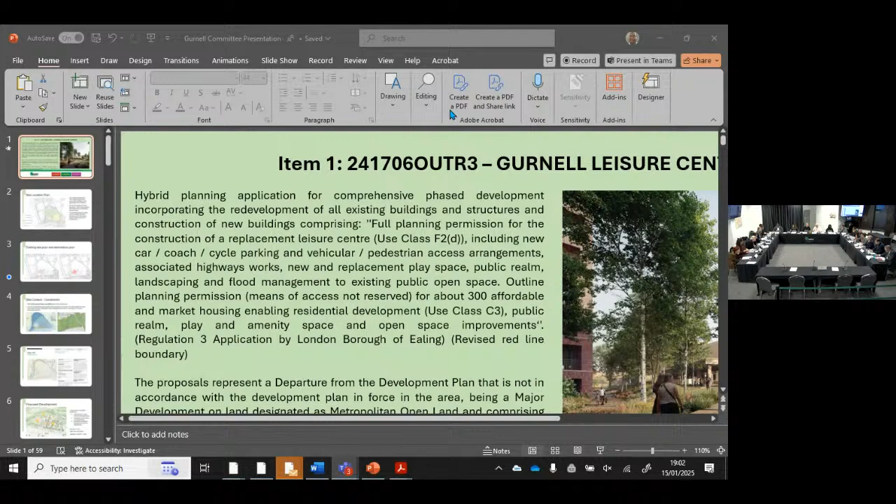Right, as I said, we're going to take planning application Gurnell Leisure Centre first on the agenda tonight. So who's doing this one? Olivier. So if you'd like to introduce it, Olivier, please.

Thank you, Chair. Just to bring to your attention the briefing notes which detailed amendments to the recommendation, namely condition 2 revised drawing numbers, condition 24 about electric vehicle charging provision, as well as further representation from Sport England, which was with regard to conditions 58 and 59 and the particular wording of those, as well as 2 additional public consultation responses which have been responded to within the briefing note, and also responses that were in the original report which was published. And then there are a few clarifications on 4 different pages, namely 14, 49, 50 and 81.

And so we're here to discuss the scheme at Gurnell, which is for a replacement leisure centre, improvement of parkland, and an outline for up to 300 homes. The scheme has been consulted with the GLA, and the Stage 1 report detailed that a replacement leisure centre is supported in principle, subject to demonstrating very special circumstances within the metropolitan open land, minimising harm arising from the application, and strengthening public benefits of the scheme.

As this is a council scheme on public land, it would be required to meet 50% affordable, but this was not possible to follow the fast track route, so the scheme was viability tested by DVS. This showed that the scheme could provide 35% affordable housing with a split of 65% social and 35% intermediate.

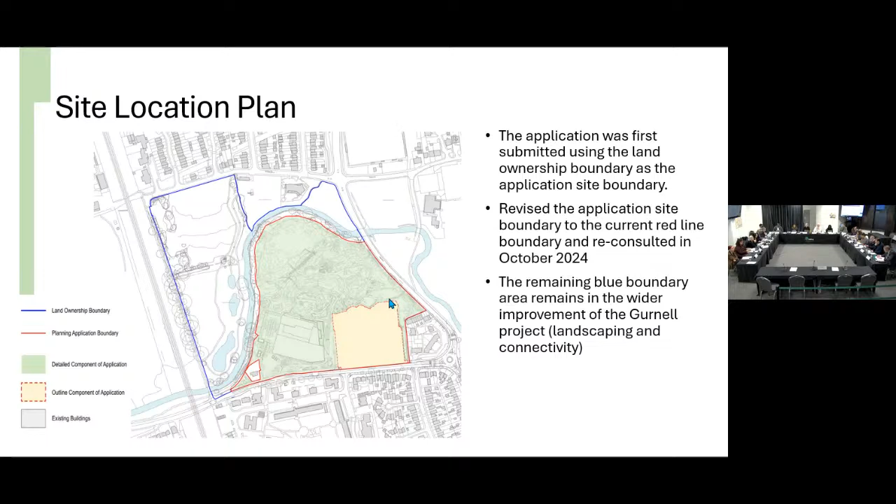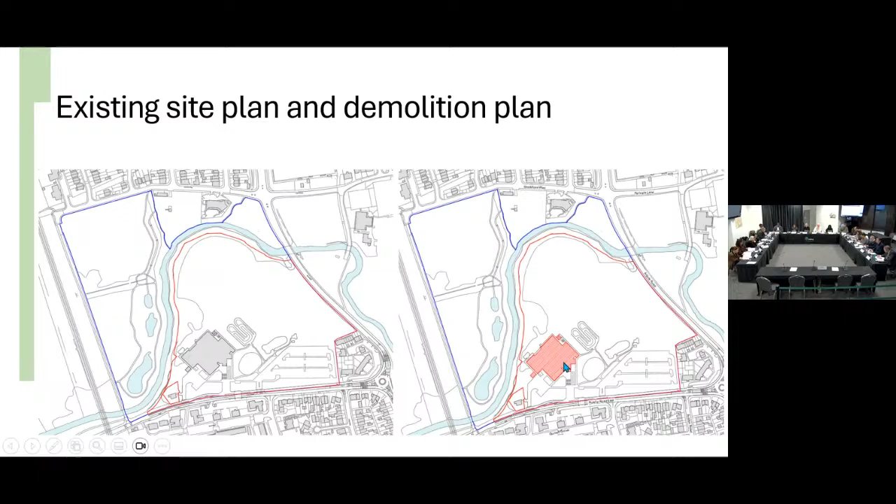This is just to show the proposed development and where the existing leisure centre is to be demolished, etched in red. The site has constraints: it's within metropolitan open land and public open space. The River Brent runs along the north and western boundaries and forms part of the Blue Ribbon Network.

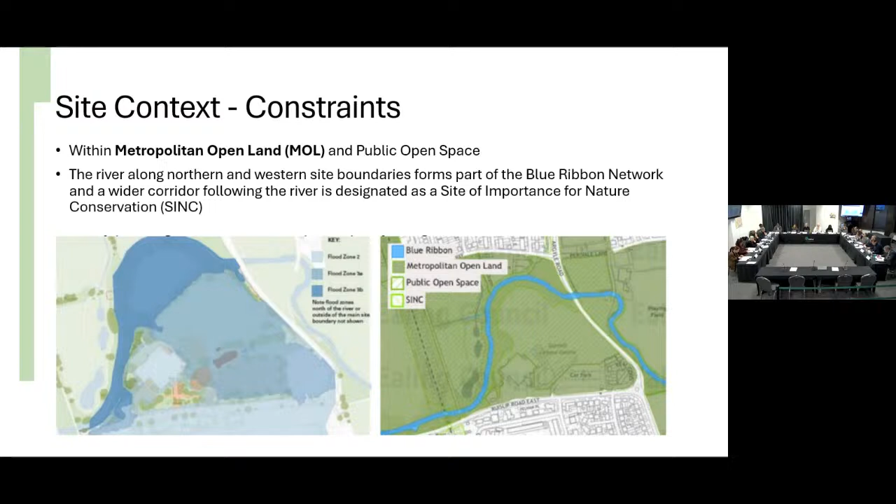Here you can see the site allocation, and it details what is considered acceptable for a proposed use. This should be a leisure-led scheme encompassing both indoor and outdoor facilities with enabling residential use. It makes reference to the previous application, the public transport accessibility of 2 to 3, and it also mentions tall buildings and heights of up to 6 storeys. You can also see the flood zone details - flood zone 2, 3A and 3B, and flood zone 3A of surface water.

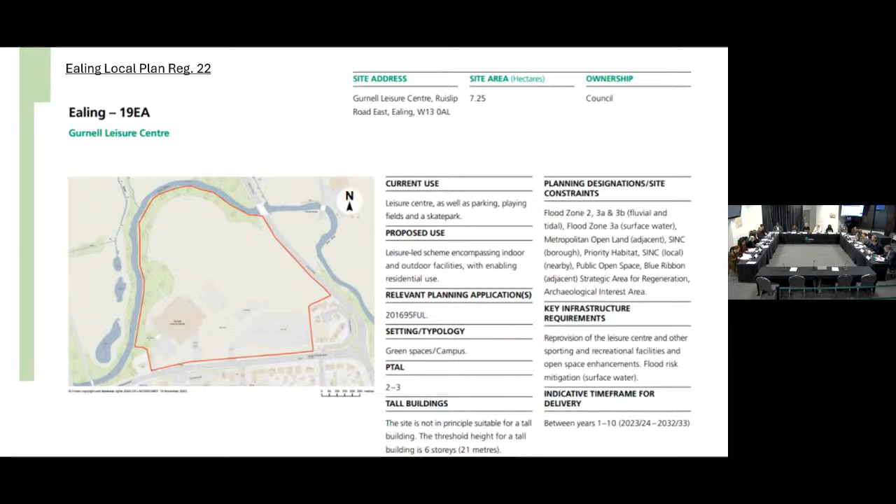And this mentions an indicative timeframe for delivery of between 1 to 10 years.

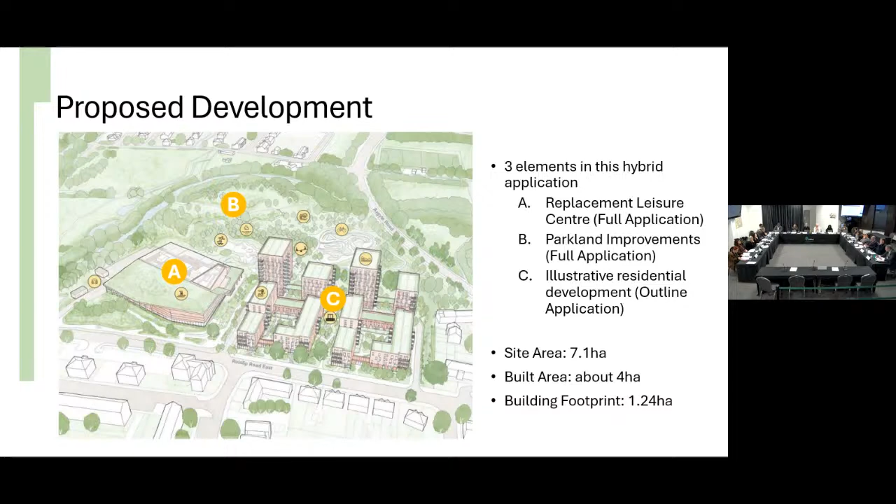Here you can see the proposed development, and this hybrid application forms 3 parts. Part A is a replacement leisure centre, which is a full application, and Part B is parkland improvements, which is also part of the full application. Part C is an illustrative residential development of up to 300 homes, which would be located here, mainly on the existing car parking space for the current Gurnell Leisure Centre, with some encroachment onto the MOL.

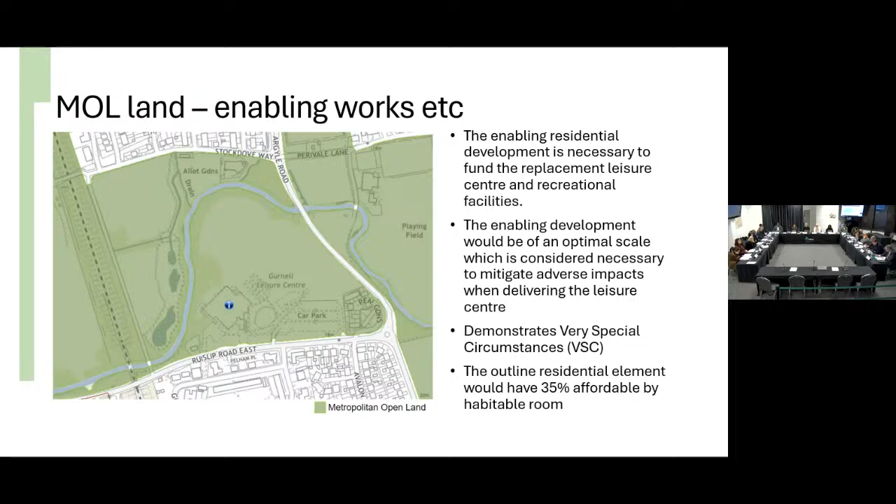The enabling residential development is considered necessary to fund the replacement leisure centre and recreational facilities. The enabling development will be of an optimal scale, considered necessary to mitigate the adverse impacts when delivering the leisure centre. The scheme and the report are able to demonstrate very special circumstances.

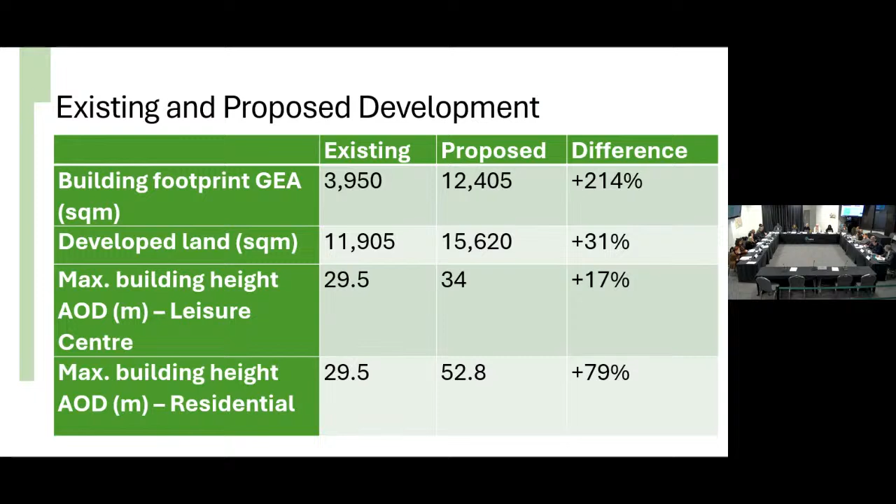Here is just a slide detailing the existing and proposed development footprints, and the increase in building footprint. In terms of the heights, that is AOD from sea level, which is mentioned at the bottom here - so that's why it would appear that the heights are higher, where 52.8 metres is mentioned.

But just to make you aware, the leisure centre would have a maximum height of 16.5 metres, and the residential element would have a height of 34.

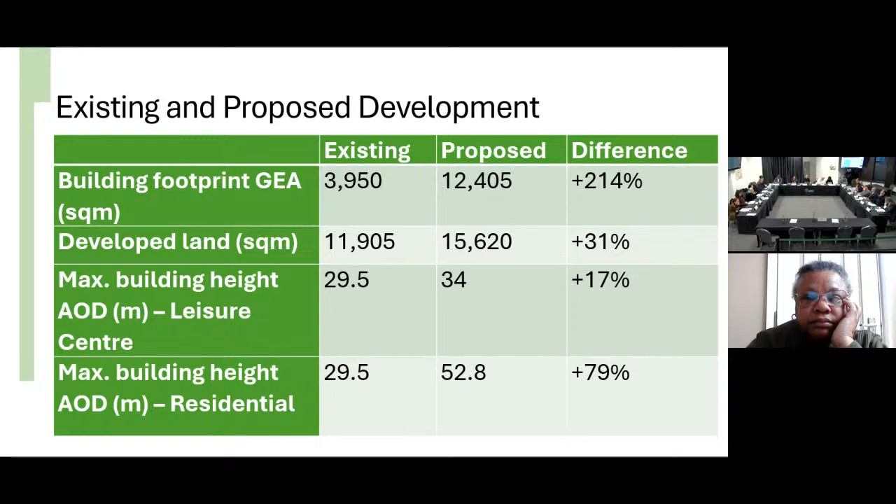So this is just a breakdown of the floor spaces of what is to be proposed. The leisure centre has a 50-metre 10-lane swimming pool, which is Olympic sized, replacing the existing 50-metre 6-lane swimming pool. As well as this, there would be gym and fitness facilities. An addition would be a learner pool, as well as fun slide pools. There would be spectators at first floor level, which I will show later on.

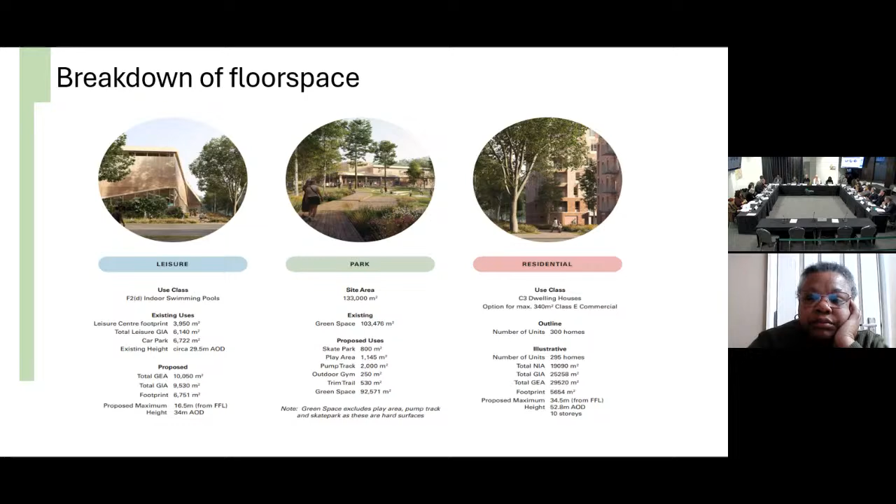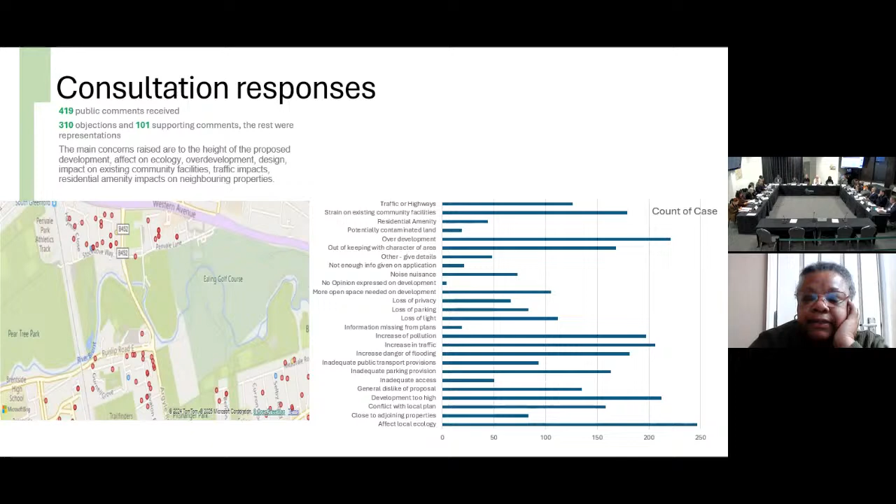With regard to the scheme, there have been 419 public comments received - 310 objections and 101 in support. Many of the responses are from within the London Borough of Ealing, and the main concerns raised are to do with the height of the proposed development, the effect on ecology, overdevelopment, design, impact on existing community facilities, potential traffic impacts, and residential amenity impacts on neighbouring properties.

As with all major schemes, there's been a lot of discussion with regard to design, and the application has been to design and community review panels, as well as referred to the GLA. This is a requirement of the NPPF. This slide details when the scheme first came in at DRP, which are stakeholders who have an interest in design within the locality, and then the community review panel, made up of members of the public in Ealing who give up their time to review schemes at an early stage.

Throughout the scheme, the design has been changed. What was considered key, especially at DRP, was the creation of design codes, and also how the leisure centre was designed. Concerns were raised with regard to coach drop-offs, especially due to the existing situation with Ruislip Road East, and this has been agreed to be moved to Stockdove Way for a waiting area.

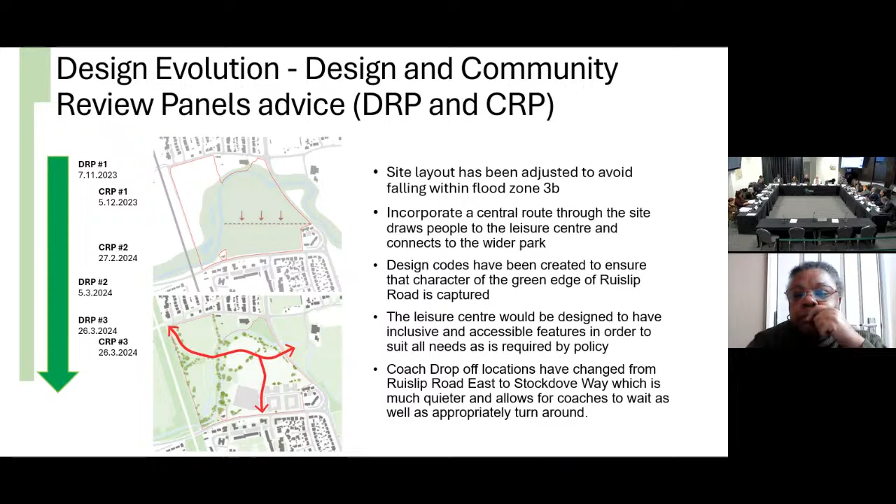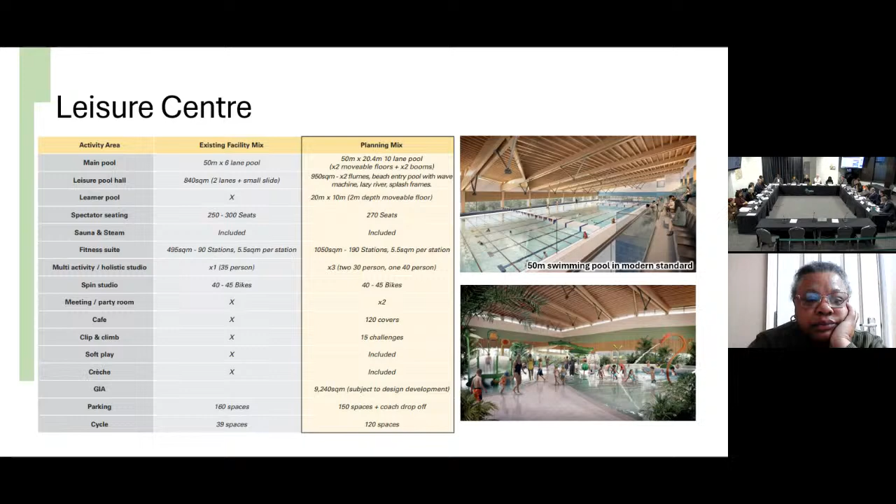Here is just detailing again the existing facilities and the proposed - there would now be the addition of a cafe, clip and climb, soft play, and creche facilities. The existing number of car parking spaces is largely the same, with an increase in more sustainable travel such as cycling, with 120 spaces proposed.

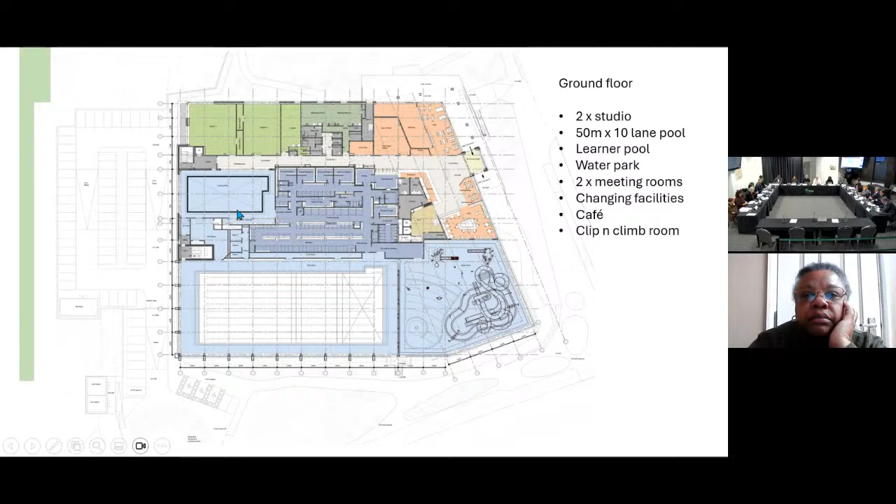Here's just the ground floor of the leisure centre. This details there would be 2 studios to the north of the site, with 2 meeting rooms close by, a learner pool just here, and then changing facilities, the large 50-metre swimming pool with 10 lanes, and then the water park with slide facilities there.

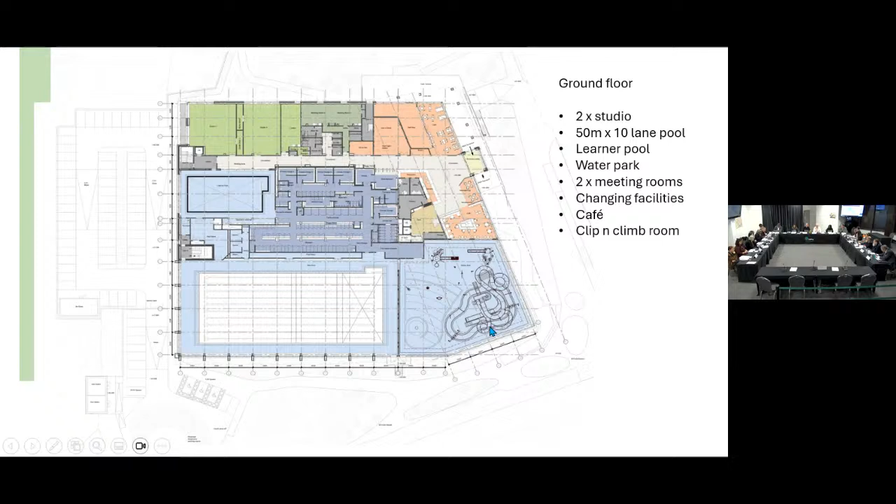Forgive me, Jack, can I just go and get some water? The only thing is, if I leave and you still continue, I won't be able to. If you can park it for - thank you. Two minutes. Okay, that's fine. That's fine. I'm glad you made it known that you wanted to do that. Yeah, it's fine.

No, just wait, otherwise you can't vote. You carry on talking. Or well, you can take part, but you can't vote.

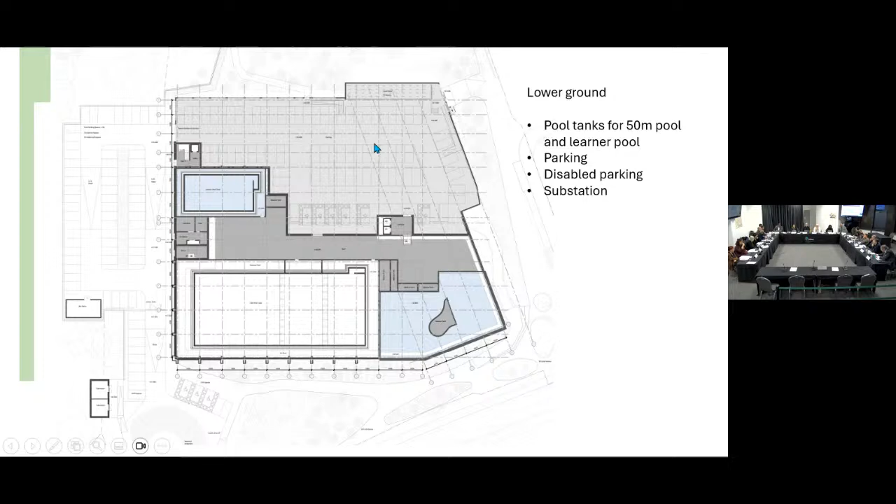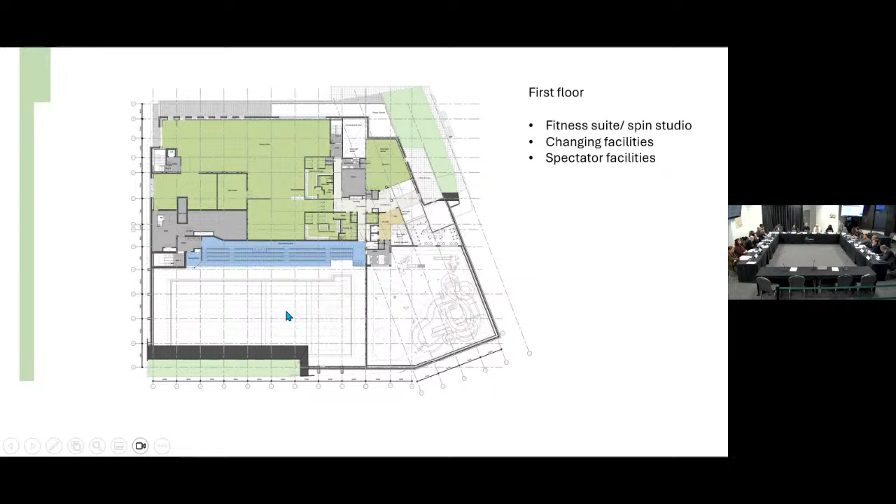Carry on, sorry. This just details a lower ground floor level with the tanks for the swimming pools, as well as undercroft parking in this location, and here you can see the external parking. At first floor level would be the fitness suite and gym, with the spectator seating looking onto the proposed swimming pool, and there are some additional gym rooms.

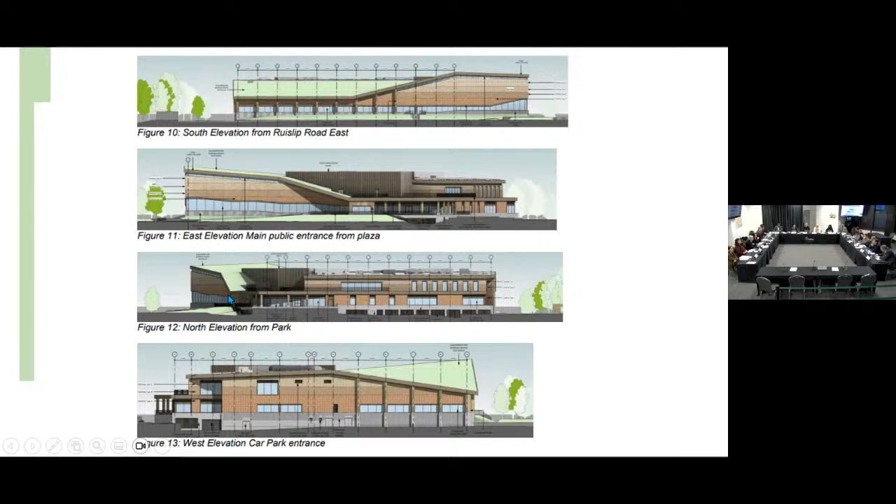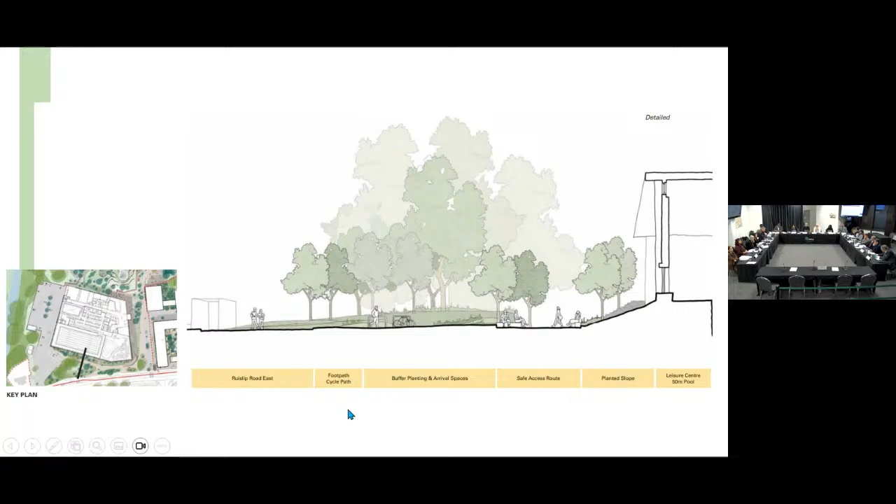These are some elevations taken from the application, showing the different elevations from different angles. What's highlighted here is that the leisure centre will be finished with a green roof. Here are viewpoints looking into the site, and you can see when standing on Ruislip Road East, showing footpaths, cycle paths, and a gentle slope up to the leisure centre.

So at the site visit, we noticed there were some surrounding buildings of residential nature, namely across the road, and these are up to 5 stories predominantly on Ruislip Road East. Then just a bit further away on Gurnell Grove are the buildings of Dunlin House, Falcon House and Kestrel House, which are 11 stories and approximately 29 metres high.

I think it's good to mention Reg 19, and when the Mayor responded, the use of 'appropriate' instead of 'maximum' should be used. The proposed building height is considered commensurate with the indicative building height in the immediate surrounding area, with the site allocation for up to 6 stories. As mentioned, 2 taller elements are proposed. The rationale for the increased height is to avoid further extending onto the undeveloped parts of the MOL and to reduce the building's footprint.

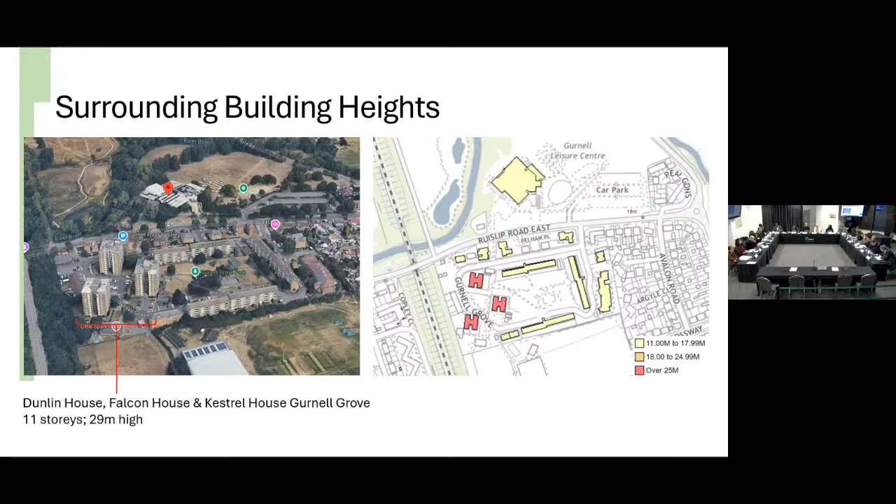With regard to flood mitigation, as mentioned, the site is in flood zone 3. The yearly chance of flooding from the River Brent is considered low. The yearly chance of surface water flooding is very low, and the risk of flooding from groundwater is low. The scheme, in terms of mitigation, proposes attenuation channels from the leisure centre to a basin in the parkland area, the creation of seasonally wet and dry habitats, and an overland flow path which channels surface water from off-site areas to the east into the River Brent. Just to note that the site has not been majorly flooded since the late 70s.

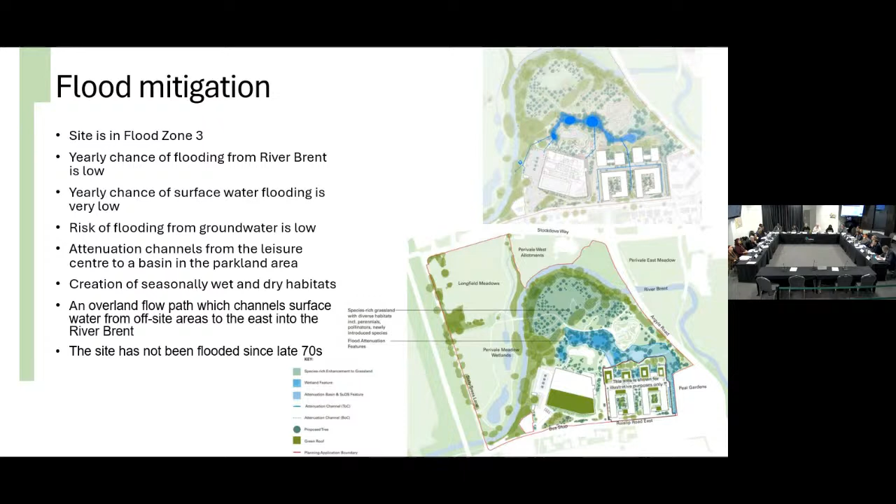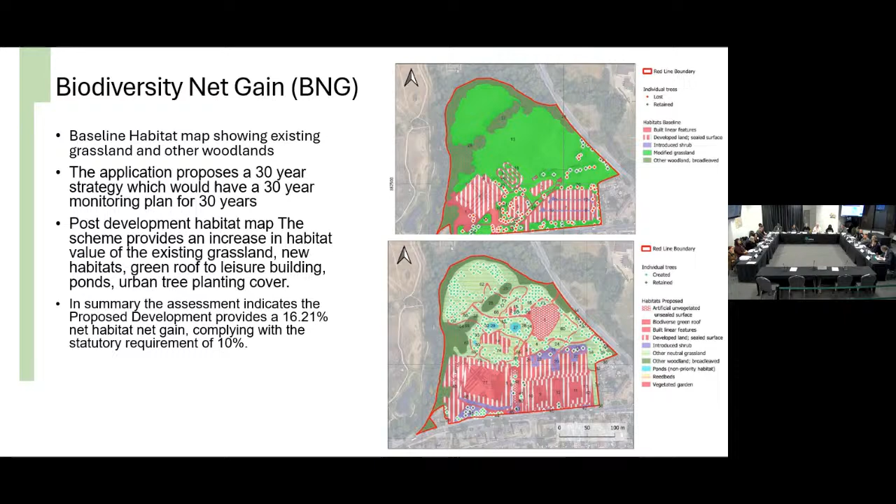With regard to biodiversity net gain, the application proposes a 30-year strategy with a 30-year monitoring plan. The post-development habitat map shows an increase in habitat value of the existing grassland, new habitats, the green roof to the leisure centre, and urban tree planting cover. In summary, the assessment indicates the scheme would provide a biodiversity net gain of 16.21%, which exceeds the statutory requirement of 10%.

Just to go through the parkland improvements, which is a key part of the scheme: there would be improved outdoor landscape facilities, a new playground, skate park, BMX track, trim trail and distance marker routes, and a new pedestrian footbridge over the River Brent.

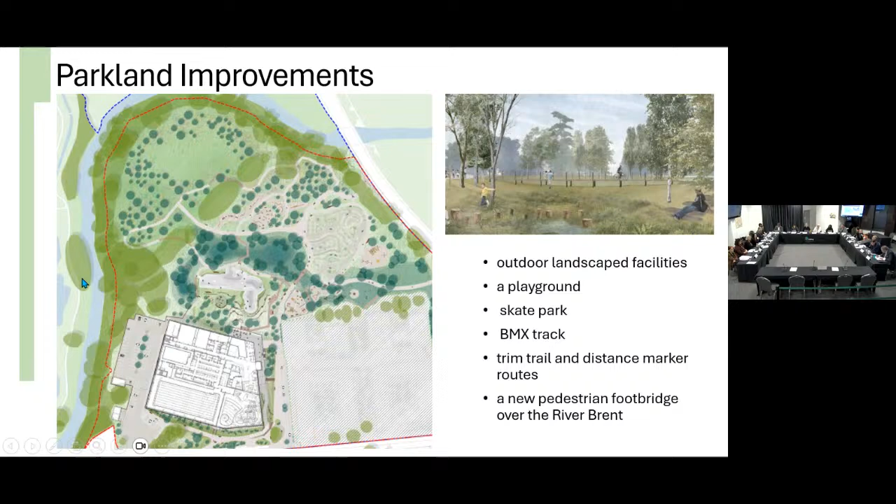As mentioned about car parking provision, 150 car parking spaces would be provided. The aspiration is for 20% of all parking spaces to have electric vehicle active charging points, with all others passive. 30 accessible car parking spaces would be provided for the residential element, and this would be further discussed subject to the reserved matters and conditions for car parking design and the management plan.

The scheme would also allow for transport improvements, such as the resurfacing of Ruislip Road East, nearby junction improvements, traffic calming on residential streets, new crossings, Toucan and Copenhagen style, cycle connection improvements, and this location shows more clearly the new footbridge over the River Brent.

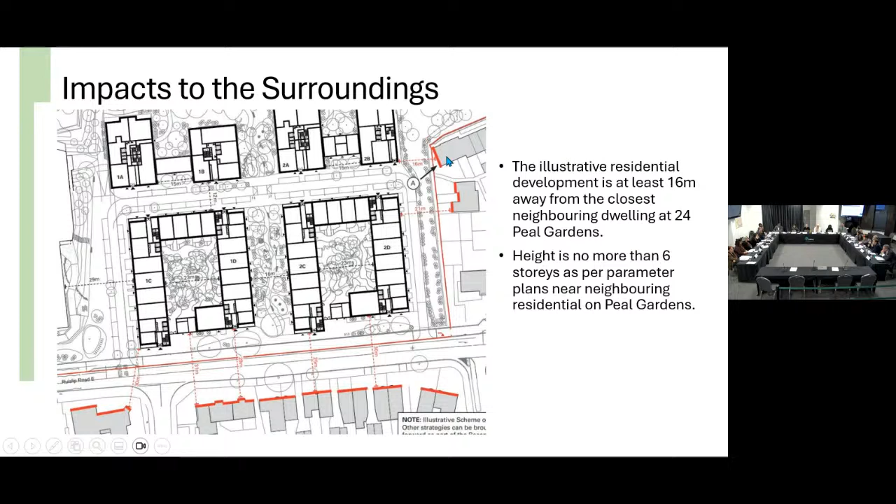So it impacts the surrounding neighbours. The illustrative residential development is at least 16 metres away from the closest neighbouring dwelling at 24 Peal Gardens, and more than 21 metres away from property at number 27. It has been designed not to have windows on the flank elevations, and it is noted that there are flank elevation windows at this property, but they are to non-habitable rooms.

This is just an indicative build programme. So we're here today at Planning Committee. Were this application to be successful following its referral to the GLA for stage 2, site preparation would be mid to late 2025. Autumn 2025 would be the commencement of the leisure centre construction. The contract for the residential element would commence next year in January, and then the fit out and completion of the leisure centre at this indicative stage would be autumn 2027.

So overall, the scheme, there is a need to replace the leisure centre and enhance the wider open space. The scheme has demonstrated very special circumstances and provides new leisure and sport facilities, as well as additional outdoor facilities. It proposes MOL enhancements and flood mitigation measures.

The Leisure Centre would provide an improved 50-metre, 10-lane swimming pool. It would double the amount of gym fitness space and increase the number of meeting rooms, have a creche, soft play, and the future operator would participate in the active programme for the borough.

The scheme would have a biodiversity net gain score of over 16%. It would go some way to meeting the new NPPF target of 3,132 homes per year. The proposed homes would provide 35% affordable by habitable room with a 65-35 split, which is in the middle of the existing policy recommendation as well as the proposed.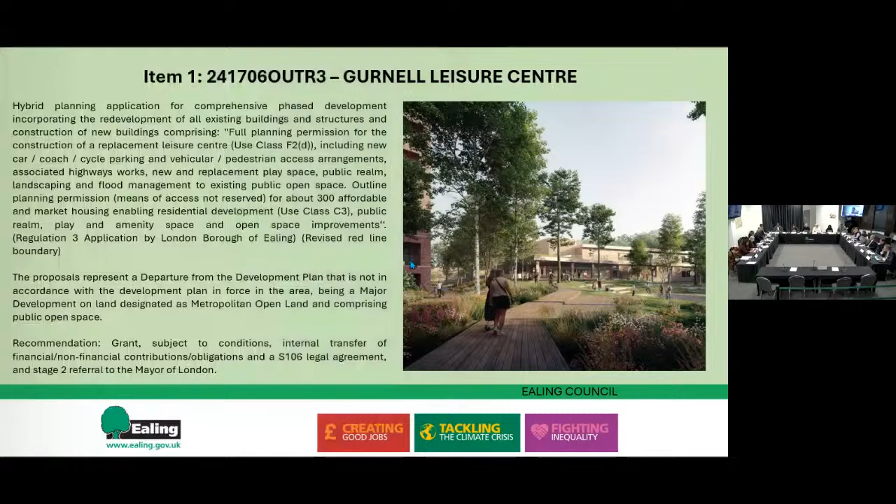Two quick questions - when you said the primary point of access to the whole site for pedestrians and vehicles will be from Ruislip Road East, will there be no access for any vehicle or pedestrian from anywhere else? And the last question - when you said the coaches will be parked, not on Ruislip Road East but on Stockdove Way, is there a specific location? It's a long road, this is in Perivale Road - Stockdove Way is a long road, so is it at the beginning, or could they park anywhere? Thank you, Chair.

Olivia, there's four questions there. Okay, away you go. Thank you.

So first question, with respect to Councillor Mahmood's question about junction improvements - those would primarily be, I guess, where Ruislip Road meets Argyle Road, and then also neighbouring areas within the site. And the footbridge, I've got that.

So this is just an indicative location. If you can see, this is where the footbridge could be over the River Brent.

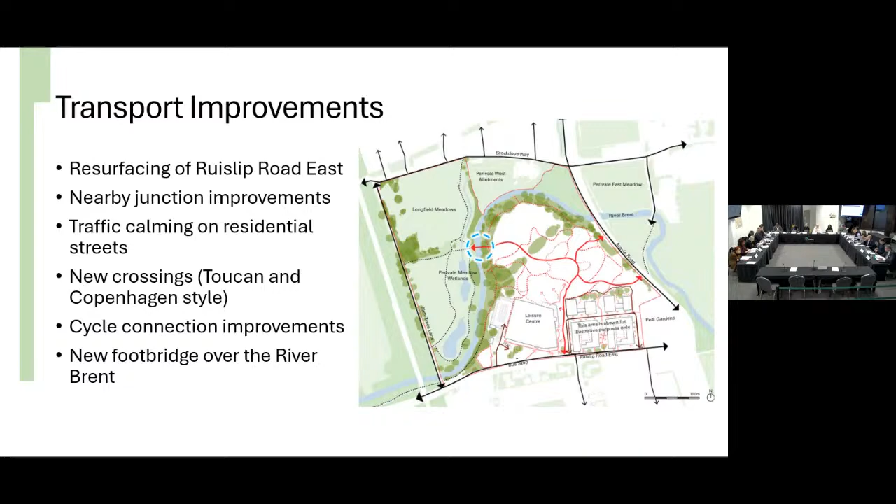And then just about parking. So access would be via Ruislip Road East. And then here you can see the external parking, and also there's a vehicle entrance into the Undercroft car parking.

But pedestrians can access a host of places, can't they? Because part of it was not just cut vehicles, but pedestrians, and that's in the report where they can. There's walkways across the site throughout and next to the residential.

And then also here you can see from Ruislip Road East, there will be some disabled parking spaces in this location, and then the residential starts.

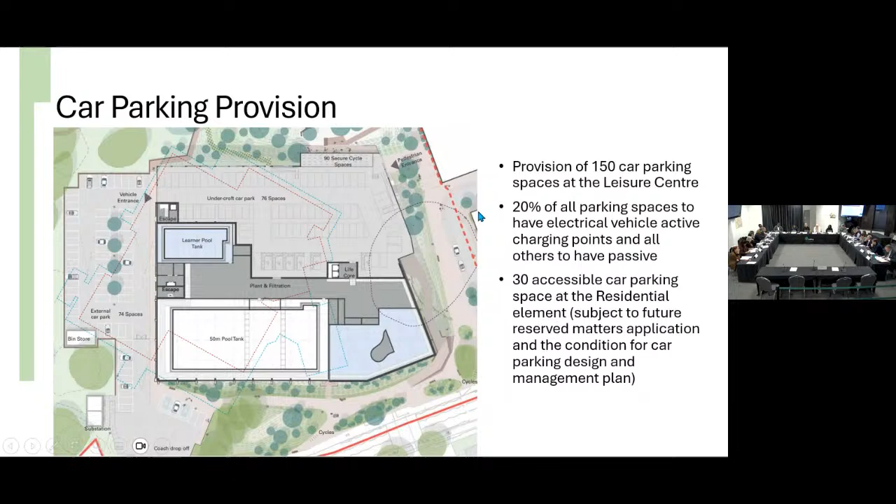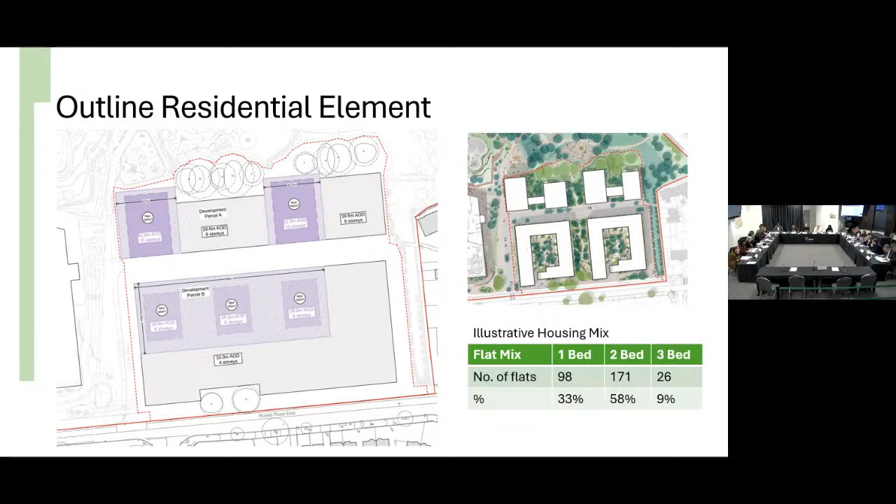Yeah, so here you can see also from Ruislip Road East and potential car parking spaces here. And the coaches, I think they're up by the athletic track on Stockdove Way. So coach drop-off would be to the front of the new leisure centre, and then there would be coach parking and waiting here within Stockdove Way. This is already existing hard standing, and as part of conditions for car parking management and coach parking, this would secure this location.

Okay, right. Councillor Shaw.

Yeah, thanks, Chair. Just very briefly, in terms of future-proofing, I noted the car parking 20% electric vehicle, which obviously is a good start. But bearing in mind the longevity of the centre should be longer than that. Are there any plans, or how easy would it be to extend this, given that we would expect more electric vehicles to be in use over the next sort of 20 to 30 years?

Right, hold that a second. Is there anyone else indicating to ask questions? Councillor Martin, just as there's only one there, so I'll take them in threes, or, well, it depends how many you've got, really.

Just got a question about the remaining metropolitan open land. For example, there's a point that talks about the housing, and it says there'll be amenity space outside, and that'll be on what it calls the existing playground. Not quite sure what the existing playground is at Gurnell, but is that green space still going to be within the public realm, or is that part of what's been lost from the metropolitan open land?

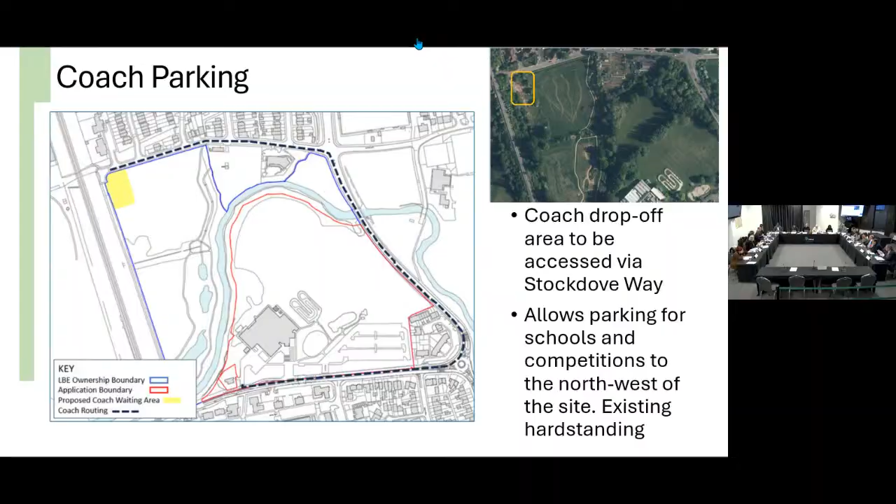Okay, that's three. Okay.

Thank you, Councillor Shaw. As mentioned about the 20% electrical vehicle charging points, those would be active, and then it would also be 80% passive, as per the London plan. As we move forward, there is the potential by having passive to also make them active, so that would be what we would consider acceptable in the future. Maybe at the reserve matters stage, that could also be looked at again.

And thank you, Councillor Martin. So with respect to the open land and the green space for the residential, that would be found within the public offer. In terms of that, the scheme would provide what we would usually ask for if it was to be private, in terms of the percentages required for the indicative number of 295 to 300 homes. So what's been considered acceptable is to provide it on site within the wider public realm improvements.

It's still public, yeah. And then, the existing site in terms of biodiversity has predominantly grasslands which are of a lower value. The increase of biodiversity up to 16% introduces newer vegetation which in terms of biodiversity has higher scores in terms of the vegetation, the tree cover, and the types of planting and how long they're likely to last for.

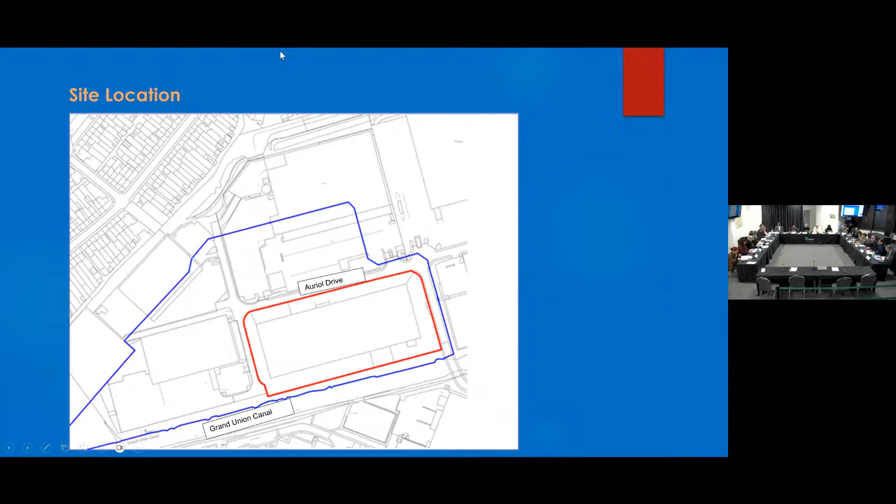Here's the site. It's within a strategic industrial location with other industrial units all around it. The proposal would provide 3 new units with over 13,000 square meters of B2 and B8 floor space, a one-third uplift of 3,245 square meters. Jobs on site would increase from an existing 60 or so to 277. There would also be 59 car parking spaces and 8 parking spaces for HGVs.

Intensification of business uses on industrial land to provide additional industrial capacity through more efficient use of land and higher plot ratios is supported by London Plan policies. This proposal would also provide a large contribution to provision of affordable workspace off-site.

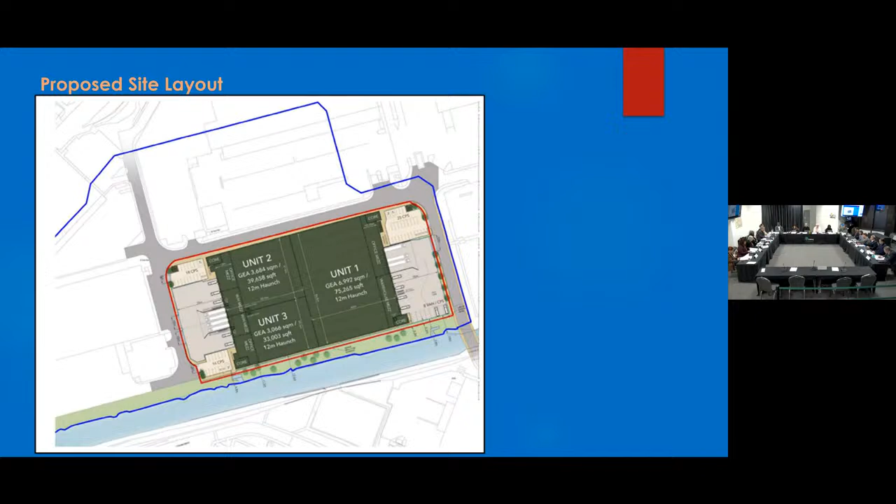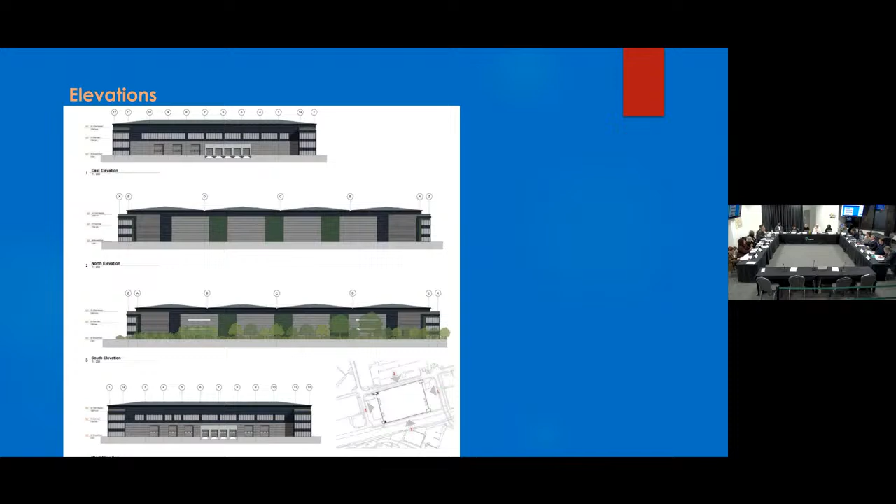The proposed new units will be slightly higher than the existing unit and closer to the Grand Union Canal. However, they would have a much reduced length along the canal, and significant tree and hedgerow planting is proposed along this frontage. The existing building is poorly screened, detracts from the visual amenity along the canal, with quite a noisy open yard, and the proposed new landscaping buffer and tree planting combined with the new high quality facade and reorientation of the unit should improve visual amenity of the canal area.

The Canal and River Trust have raised no concerns on the scale and design of development, or its visual impact on the canal conservation area, and all the Trust's requested conditions to safeguard the canal have been applied. Although the site adjoins the canal conservation area, the benefits of the proposal, including provision of modern industrial buildings and creation of several hundred additional jobs, are considered to outweigh any limited harm to the conservation area that may arise.

There are no residential properties near the site which would be affected by it, and no objections from nearby occupiers. The increased scale of development and jobs will have some transport impacts, but these will be mitigated by Section 106 contributions of £64,000 towards improving walking links between the site and Greenford Station, helping to promote sustainable travel to and from the site. These include contributions towards Auriol Drive, Oldfield Lane North Junction improvements, and the Ockham Drive Oldfield Lane North Junction, and also underbridge lighting on the way.

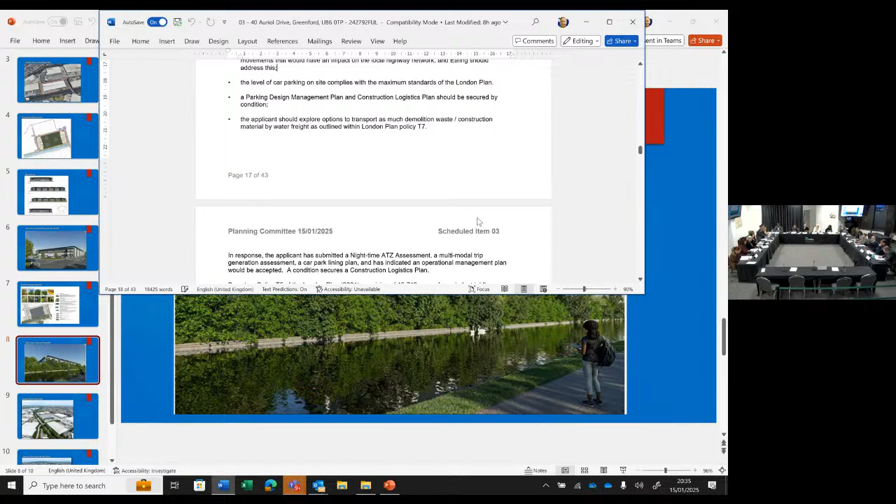So if I could just ask about HGV movements, and especially thinking about the 92 bus route, as well as the cars along the road. It does mention, as part of our own indications, that there'll be additional 30 movements in the peak direction and roughly 10 in the opposite direction, south of Auriol Drive on Oldfield Lane. Even though it thinks those queues would dissipate quite quickly, TfL does raise the point of increased HGV movement during peak periods and measures to mitigate that.

What concerns me about the 92 bus route is that it can get stuck in a lot of traffic along the way, taking a long time to get from one point to another even though it's a short distance. But actually that stretch of road tends to be quite clear. So it's a little concerning that more development might increase traffic and make that bus route even less reliable than it is now. I wondered what can really be done to mitigate that, so we don't end up with a lot more traffic as seems to be anticipated here.

Thank you. Just to be clear, that's when it's built, not when it's being built — you're talking about post-build, not the construction traffic.

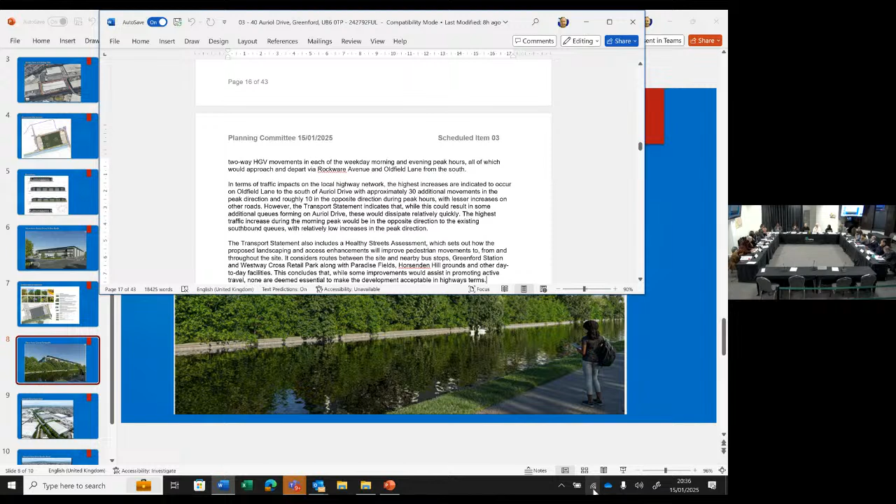Okay, thank you. Well, we got our council's transport team looking at these points and to review the transport statement, including these HGV movement numbers. Basically, they thought it would be difficult to do more than provide or request Section 106 contributions to improve the two relevant junctions. They didn't think there was enough transport impact to do more than that, and that was their recommendation — that should be enough to mitigate these impacts.

Okay, I suppose it'd be interesting — though I'm not sure how much you can really say about it in this case. It does interest me how you can mitigate for that, because it doesn't matter how much money you put into something, it doesn't necessarily mean the road suddenly clears. But we'll just have to have some hope and faith in that.

I suppose it wouldn't do their business any good having their lorries stuck in a queue, so they'd probably try to disperse the lorry movements throughout the day, maybe even into the evening, or 24/7 — I don't know the operation, but if they start losing money because lorries are parked up, they'll move them as they can.

You don't get a 92 by any chance, do you? Do I declare an interest? No, okay, that's okay, I was joshing really. Councillor Mahmood — so, Chair, thank you, Chair. It's very difficult to ask the question with somebody next to that, but I'll try.

Just some good news for Councillor Rice — as far as I understand the plan, at the moment the existing unit is run by a company called Palletways, with heavy vehicles coming out and going in every 5 minutes. After this development, Palletways will be saying goodbye to this site, so heavy vehicle traffic will automatically be reduced. This is just from my knowledge.

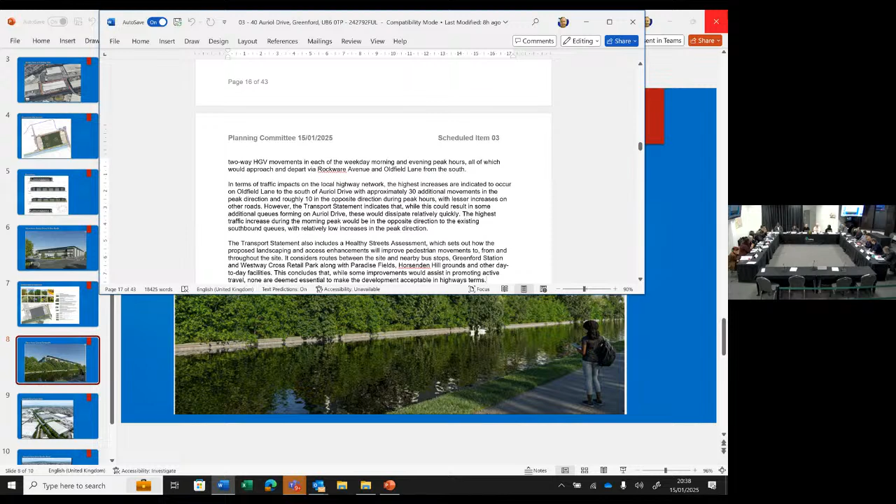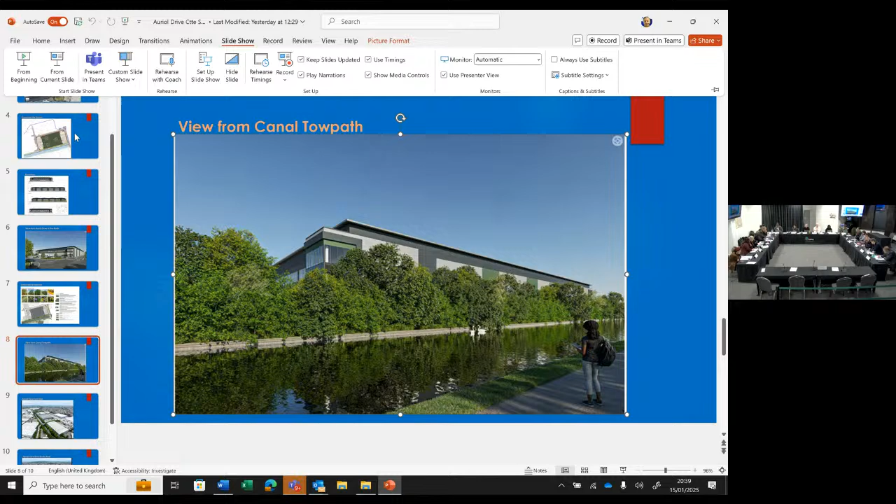My question is about the back of this development, alongside the canal — we were talking about the river and the Canal and River Trust. There are only two recommendations, only two concerns they have: as your report says, don't put heavy floodlights towards the canal, and install measures to prevent ecological harm — no external light should be installed. Have we considered that?

Okay, sorry, share the mic between you. I think we've got a condition to deal with external lighting, and that's going to be dealt with in consultation with the Canal Trust to make sure they're satisfied with it. That was a condition they requested, and we put that on. Thank you — I'm sure they did, yes.

I've seen no further questions, and I don't see any indications of people being vociferously against this. So I'm wondering, shall I go straight to the vote for the committee? Okay, right, all those in favour, please show.

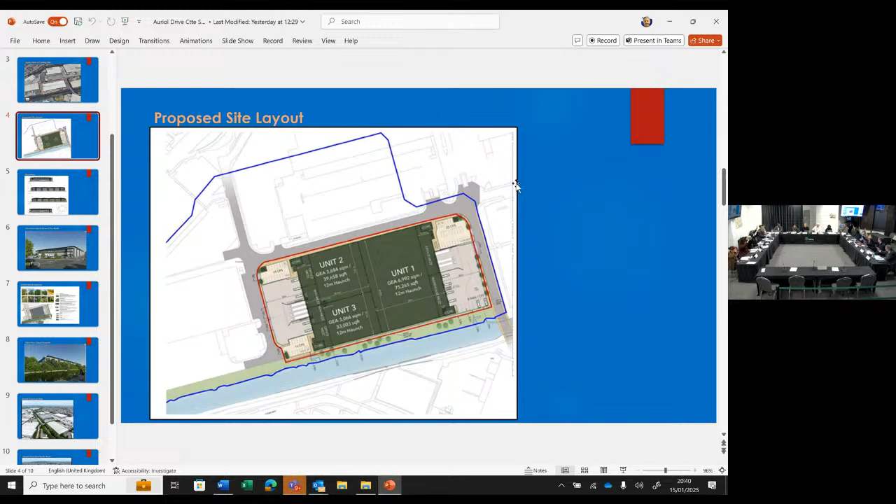Right. Just for clarity, all those against? Any abstentions? Thank you, that one's carried.

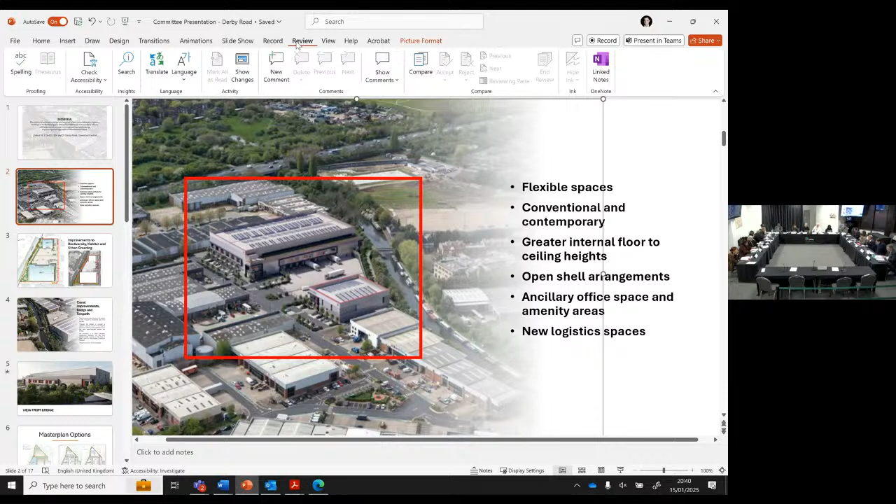Agreed, approved, whatever. Right, let's move on swiftly to Derby Road. It's yours. Yes, this exciting one.

The proposed development involves the demolition of existing buildings and the construction of 2 buildings, which collectively provide for 9,920 square metres of internal space. The site is located within a strategic industrial location, and the proposed use classes of E(g)3, B2 and B8 are wholly compliant uses as defined by policies E4, E5 and E7 of the London Plan.

The design of the proposed buildings would allow for the maximum amount of flexibility to accommodate a wide variety of potential occupants. The buildings adopt a more conventional and contemporary form of development, greater internal floor to ceiling heights, and large open shell arrangements. The proposal will deliver a more substantial logistics area between the 2 buildings.

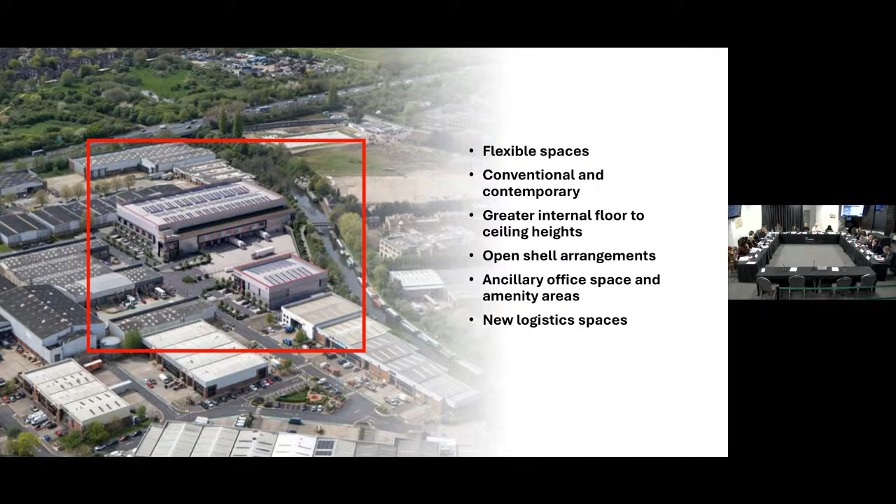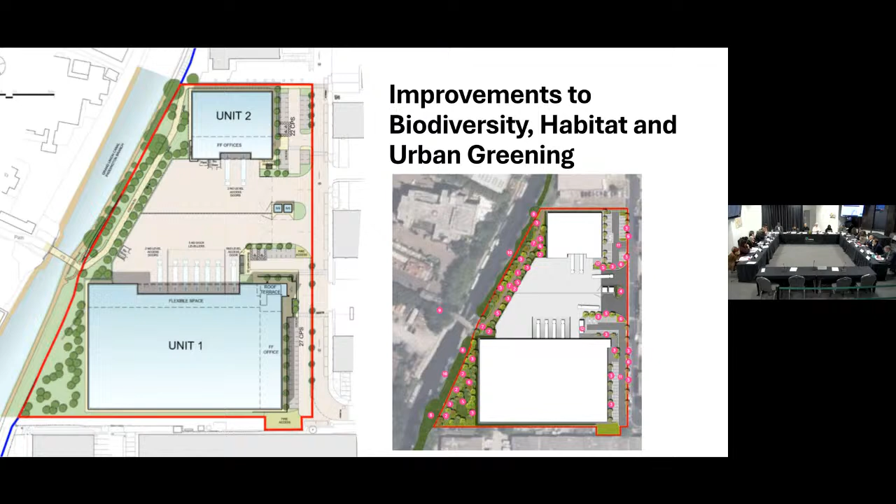A significant benefit of the proposal is the improvement to the relationship between the site and the canal. The buildings will be set back significantly from the canal in comparison to the existing situation. This provides the opportunity for greater habitat, biodiversity and urban greening, as well as an improvement to the visual amenity area and new bicycle and active travel routes.

The applicant has been working closely with the Canal and River Trust to provide improvements to the towpath, bridge and accessibility between the two. This is detailed within the draft heads of terms and also shown on the screen. This provides an opportunity for a new cycle pedestrian route that would wrap around the site, providing improved active travel infrastructure as mentioned.

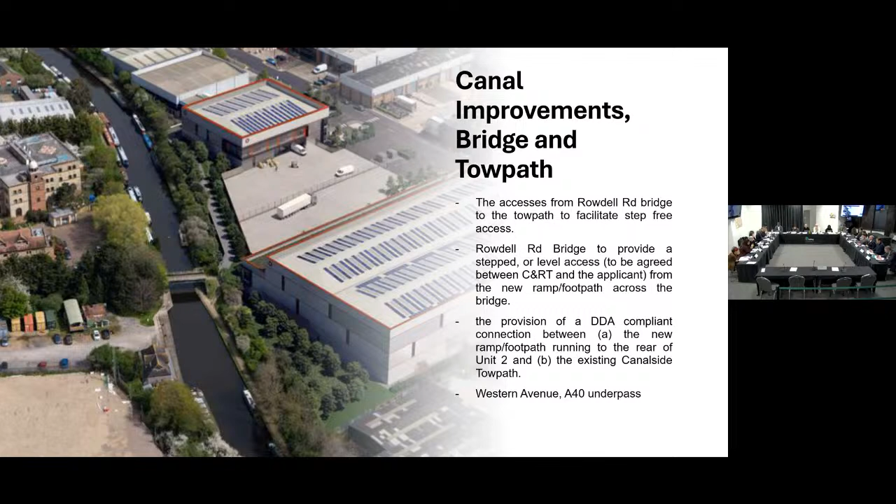And here's an image of Unit 1 from the bridge, the bridge that crosses the canal.

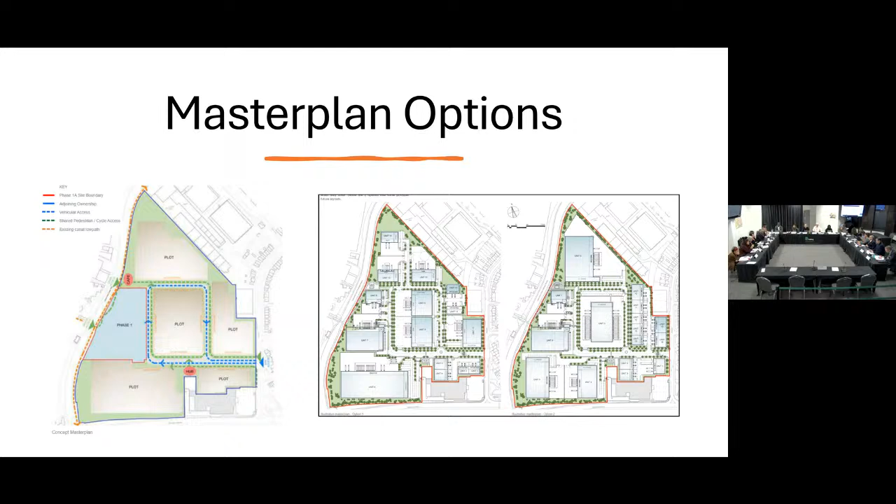This is proposals for the first phase of redevelopment of Metropolitan Park, with the applicant intending to deliver wider regeneration of the area. All future phases would be subject to planning permission. However, the applicant has followed a plan-led process to ensure that all future development could work together in a cohesive manner. The high-quality design of the buildings will set a benchmark for future phases of the development.

There will be a significant improvement in the sustainability of the buildings, with the proposal resulting in a 100% reduction in overall site-wide CO2 emissions, effectively net zero. It is considered the proposed development is wholly compliant with the development plan for the borough, and it is recommended the application be approved, subject to conditions and a legal agreement. I'll just refer the members to the briefing note, which provides some minor changes to conditions.

Thank you. Thank you, John. Okay, I'm going to open up for questions.

Councillor Rice, this is about the 92 bus. No. Right.

No, I just want to express a few concerns and ask a little bit about the consultation that was done with the public. If you look at page 6, it says there were no public comments received during the statutory consultation period, and this does raise alarms with me, because I know people who live in the moorings, in the boats along there, do have a lot of problems when it comes to pollution and noise from the industry so nearby to them. So I'm amazed they haven't really said very much. It says here there was a site notice, but where was the site notice? I don't know, was it really that visible? Also the consultation ran from the 24th of July until the 14th of August, so we're talking about a time when a lot of people may have gone away and may not have seen any site notice, even if it was close to where they live. So I just want to make sure we do a proper consultation with people who live in the area, to make sure they're happy, because we don't need another list of complaints from people suffering from noise and pollution. Thank you.

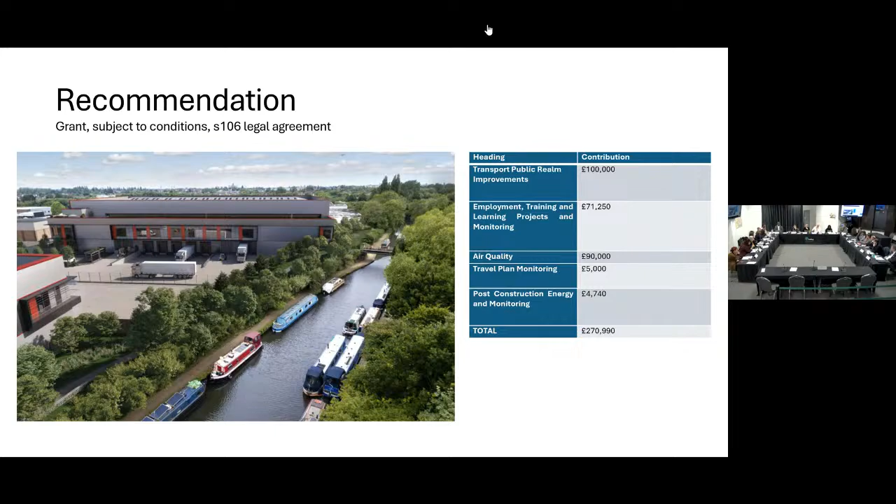Thank you, Joel. I see no more indications for questions, so I'm going to do the same as I did with the previous application. Do you want to go straight to the vote? Okay, please indicate if you don't. Right, okay, I'm going to go straight to the vote. All those in favour, please indicate. Okay, just for clarity, all those against? Any abstentions? Right, the application has passed.

Thank you, Joel. Right, we move on to the last one on the committee papers. What have we got? Right, okay, so we're going to 'the green', is it? It is units 418, 419 up to 21... sorry, that's the wrong one. 19, the green. It is the green, 13 to 19, the green, Southall. John, okay, do you want to introduce, please? Thank you.

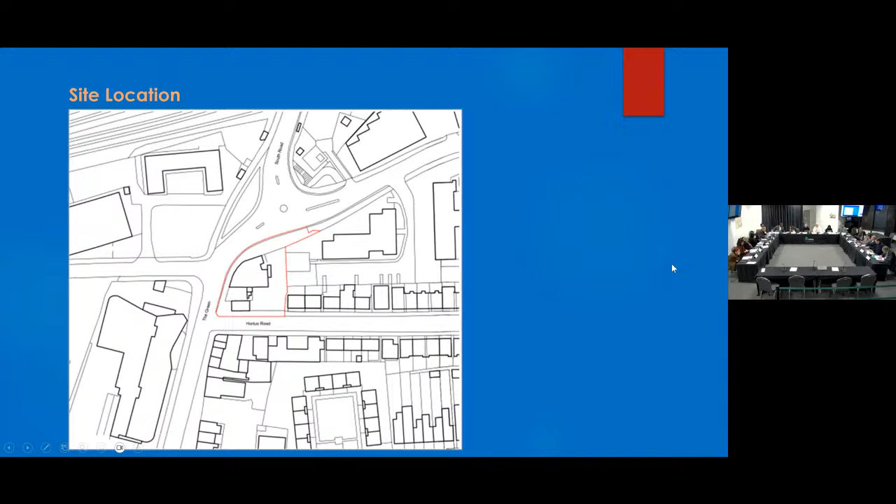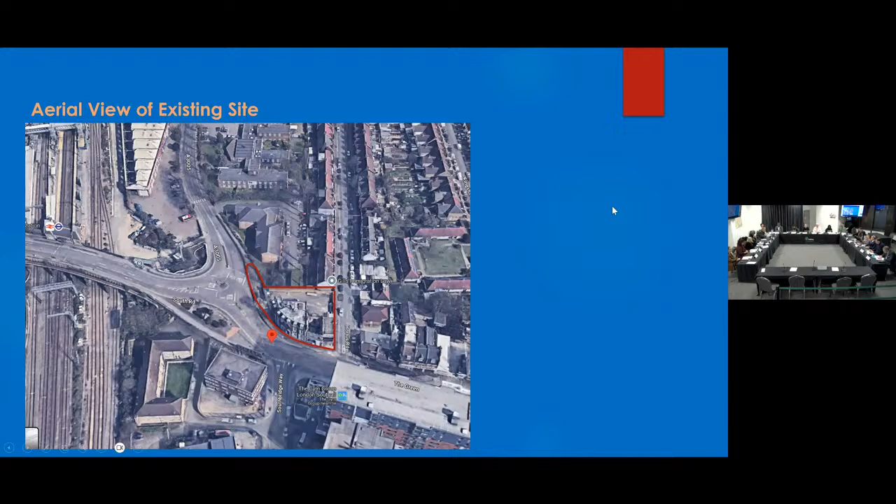This application is to redevelop a vacant commercial site to provide student accommodation. This is the site. It's a fairly small site and lies in the Southall Opportunity Area, just south of Southall Railway Station, at the junction of Hortus Road. The surrounding area has had major development in recent years, with permissions for large residential schemes in high buildings up to 23 stories. This site has been to committee several times before, most recently in February 2024, when planning permission was given for a Part 23, Part 19 and Part 14 story building to provide 95 flats. The current proposal relates to a slightly expanded site and will provide a 23-story building of the same height and similar massing as the previous scheme, but without the 14 and 19-story shoulder elements, and this time to provide 424 student rooms instead of flats.

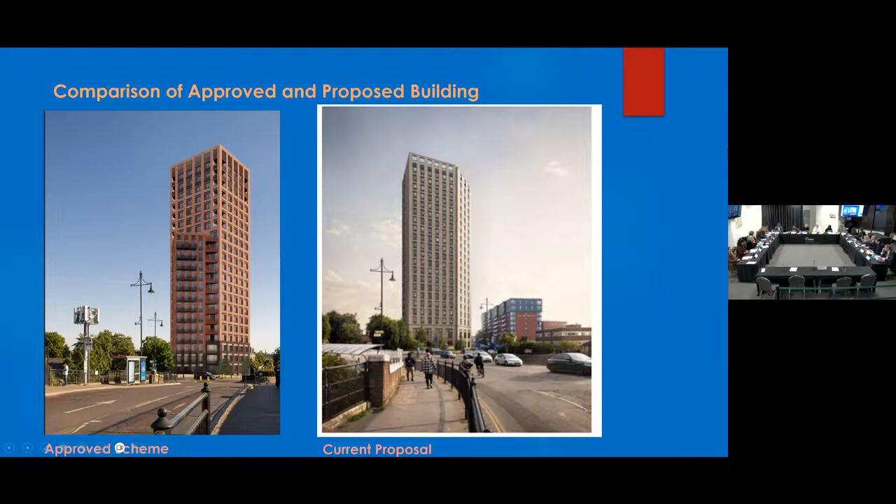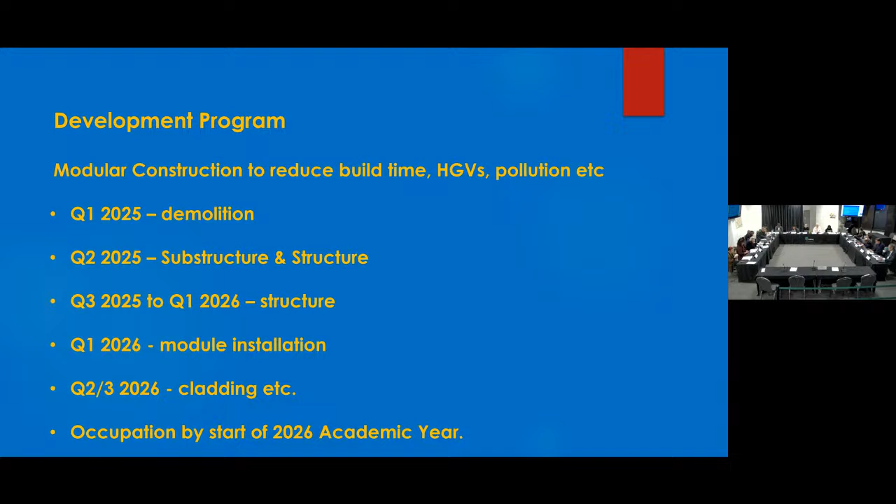The development would be car-free and have 329 cycle parking spaces. Communal indoor and outdoor amenity space is proposed at ground, first and second floor levels. This is how the two schemes compare: similar heights, but different materials and form. It's worth noting that the development would be implemented using a modular construction approach, with much of the building elements manufactured off-site. This aims to greatly reduce build time, pollution, and HGVs on the site, with completion scheduled for the start of the academic year in September 2026.

The proposed 424 student units would help to meet a shortage of purpose-built student accommodation in this part of London. It would also contribute to meeting local housing demands, since new student accommodation could free up existing dwellings currently being occupied by students due to a shortage of suitable accommodation for them. In addition, 35% of the proposed student units, or 148 rooms, would be affordable.

The scheme was assessed against the London Plan Policy D9 criteria for tall buildings and the Ealing Housing Design Guidance, which set out various criteria for development, including tall buildings. Overall, the proposed building would accord with most of these design guidance criteria. The GLA has raised no objection to the site of building in this location, and it's been reviewed by the design review panel. So on balance, this tall building is considered acceptable on this site and in keeping with its surroundings.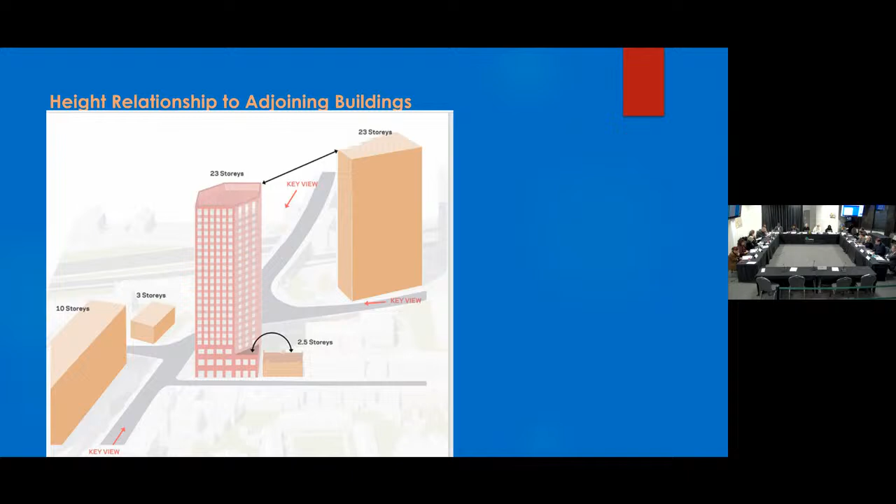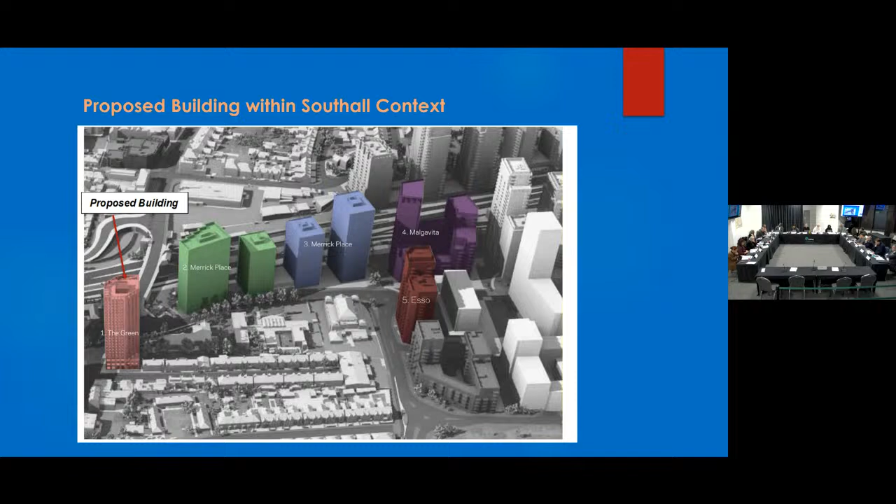This is how it looks within the group of other tall buildings in this part of Southall. As in the previous scheme, the building would have a well-defined base, middle and crown, differentiated by different colours of brick, window sizes and decorative metal panels.

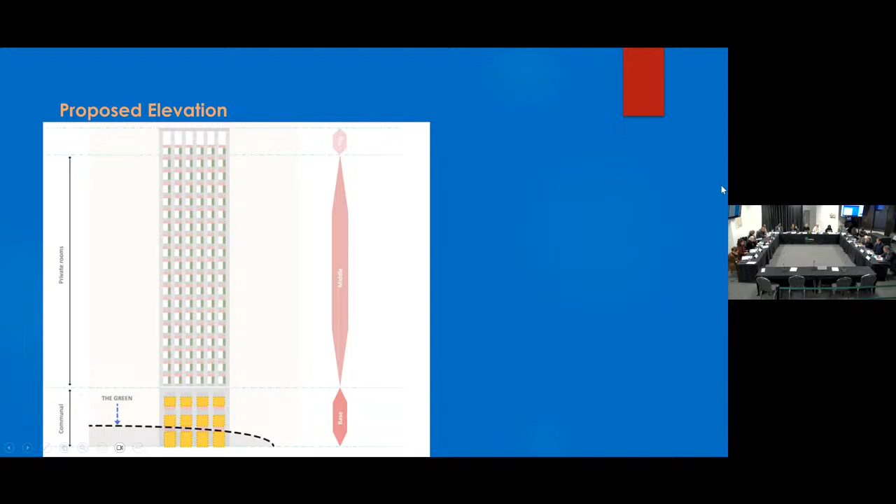An active frontage would be provided on the green. Overall, the scale of buildings and the design are considered to be of good quality and to complement other developments in this area.

Given these will be student rooms, all will be single aspect units, but would have adequate living conditions in terms of floor space, layout, daylight, and visual outlook. The room sizes will be comparable with other student housing schemes approved in Ealing in the past.

And the student rooms will be operated in accordance with the management plan submitted by the applicants, and a condition requires this.

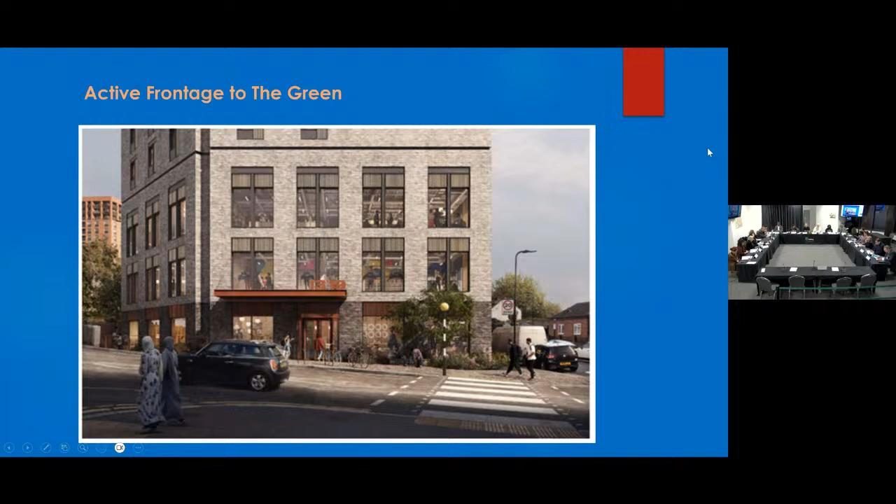Internal amenity areas are proposed on the ground first, and an external communal area on the second floor. Given the constraints of this small site, there would still be an overall shortfall in amenity space, and this would be mitigated by Section 106 contribution towards improved provision in Southall Manor House grounds.

The development will not have any significant impacts on the amenity and living or working conditions of adjoining occupiers due to its separation distances from nearby dwellings and the orientation of windows.

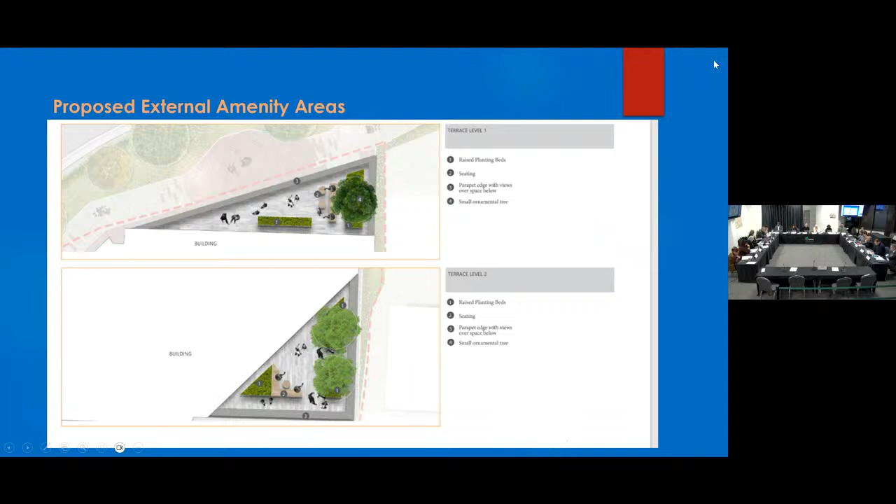Something like 11% of the site area would be provided as public realm space. This would provide widened pavements, green planting areas with new trees, benches and integrated street lighting to improve the public realm area to the scheme and the raised highway.

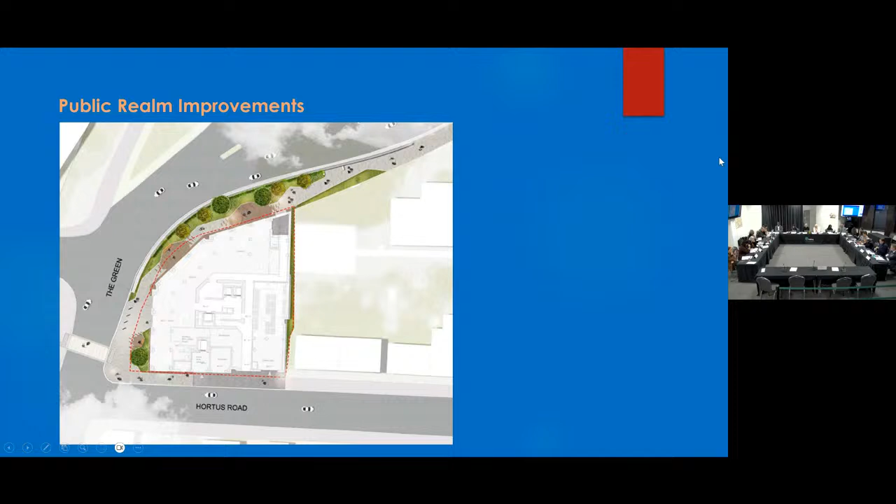New landscaping is proposed on both the green and Hortus Road frontages, while the existing retaining wall to the green would be retained to provide a robust buffer to traffic and associated noise. An urban greening factor of 0.4 would meet the London Plan target.

This slide just shows the comparison between what it's like now and how the public realm area might look when this development is completed.

In terms of heritage impacts, the heritage assessment with the application indicates it would have no greater visual impacts than the previously approved scheme and not cause any significant harm to nearby heritage assets, which are all some distance away from it. Any harm would be outweighed by the benefits of the proposal.

In terms of sustainability, it would have high standards of design and construction and would be all electric, using communal air source heat pumps. Photovoltaic panels would be maximised across the roof. With these measures, the overall site-wide CO2 emissions will be cut by something like 13%.

However, the predicted energy use intensity is 40% better than the GLA benchmark and 72% better for space heating, and the Council's energy advisor considers these indicate a well-designed building in sustainability terms.

Any potential impacts with regard to air quality, noise, wind effects and land contamination can be adequately dealt with by the conditions proposed. This is a car-free development.

Transport Services and TfL have assessed its potential implications for the local highway network and considered it acceptable, subject to financial contributions towards review of existing CPZs, junction improvements, bus stop and bus capacity improvements, improvements to local pedestrian and cycle infrastructure, and other factors. We've agreed Section 106 contributions for these measures.

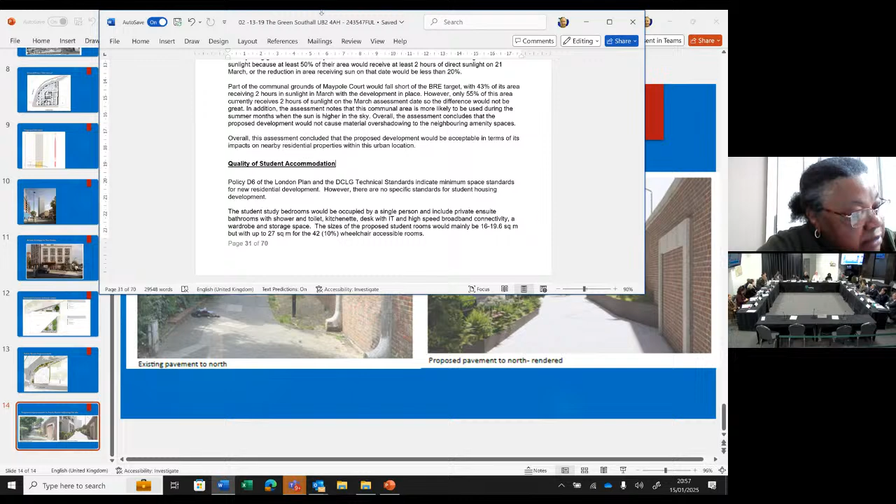Which university will this development be linked to? There are increasing social problems caused by the influx of overseas students in Southall without any increase in social and community infrastructure to support them. If there are no university residential advisors on site, the risk to safeguarding vulnerable students will be difficult, and almost certainly windows will need to be bolted shut to reduce the risk of students jumping to their deaths by suicide.

There are no higher education institutions in Southall, so there is no need for student accommodation. Any such accommodation should be built either in Ealing, which has the University of West London, or in Uxbridge, which has Brunel University. This will benefit the students too, since they will be nearer to campuses, especially for female students who may not want to travel long distances to get back to their accommodation.

There's been rapid expansion in the amount of housing around Southall railway station, but there's not been the equivalent increase in infrastructure. Deprivation indices already rank the Southall Green area as very bad for outside environment deprivation and barriers to services. Unless services and basic provisions such as increase in schools, GP practices, etc. are made available for the new developments already in place, there should be no further accommodation developed in this area.

You know the slide on landscaping, if you can get that up, please. I think I raised this before, the last one, unless I'm going doolally. No, it's the picture.

Yeah, that one. Obviously that's public realm, isn't it? To the right of the picture, which is the computer image of what it will be looking like, my right, your right as well. Yeah. So on the right of that is public realm, which I'm presuming is our public realm.

That there, I think I brought it up last time. I think the wall, maybe that area has been subject to antisocial behaviour down there, and I'm just seeing that wall as a sort of congregating point, a sitting point, almost a bench.

And I'm pretty sure I brought it up at the last committee, saying if we could just take the wall away and have lower shrubs there, it would stop that element of standing or sitting. That's my view. But if that's what's in front of us tonight, then I'm just saying if we can take that away, maybe. I'm sure I said it before, but never mind. It is what it is. It's not the biggest deal, but I think it's an improvement that could be made.

It's kind of a statement really rather than a question, so you don't need to respond. Okay, right, I'm going to open it up for debate. Councillor Kelly, that's why your hand was up. Right, got it. Anyone else, please indicate and I will take them in order.

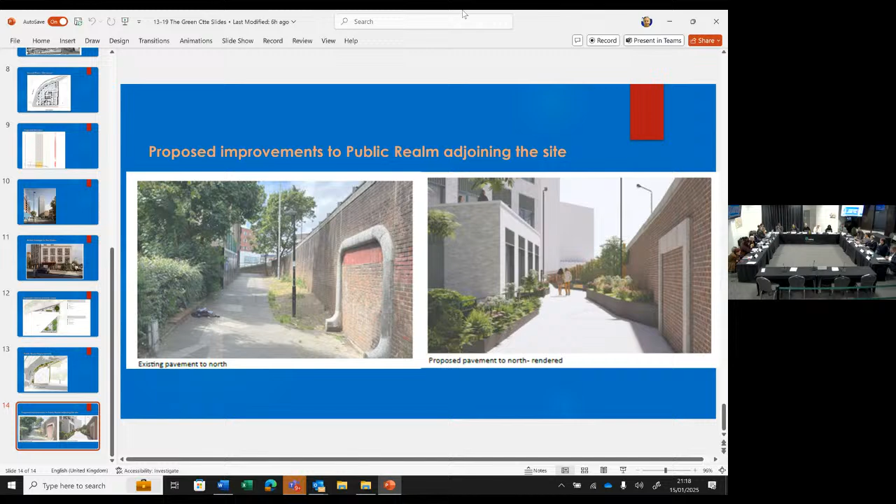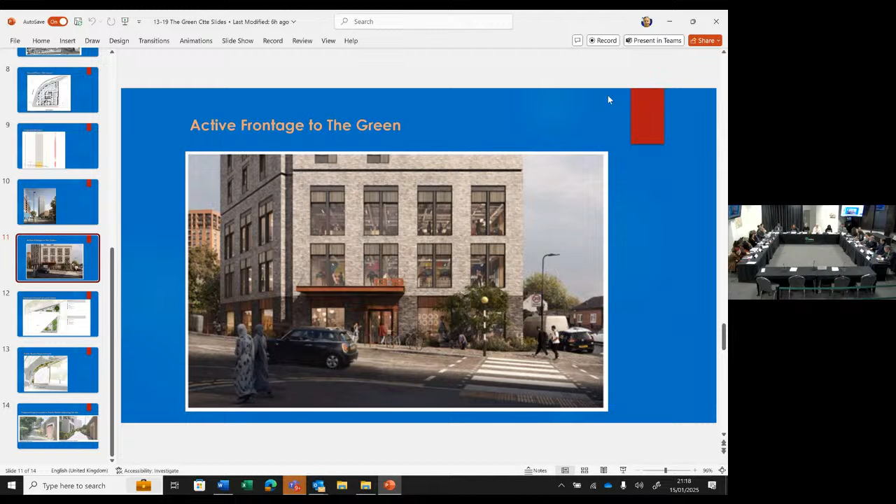All those in favour, please indicate. All those against? No? You don't want your vote recorded, Councillor Young? No? Okay, just checking. All right, any abstentions? Thank you. Sorry, that's passed, by the way.